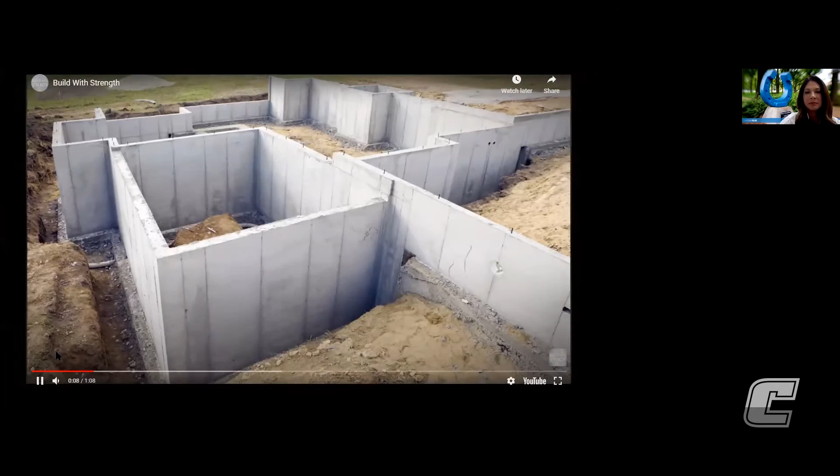Dr. Brown, is there supposed to be sound associated with this video? There is, you're not hearing it? No, you need to share your sound system with us. Sorry about that.

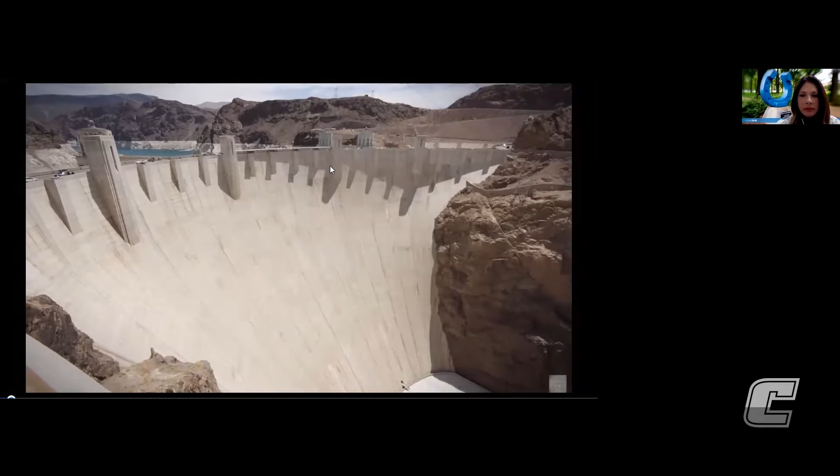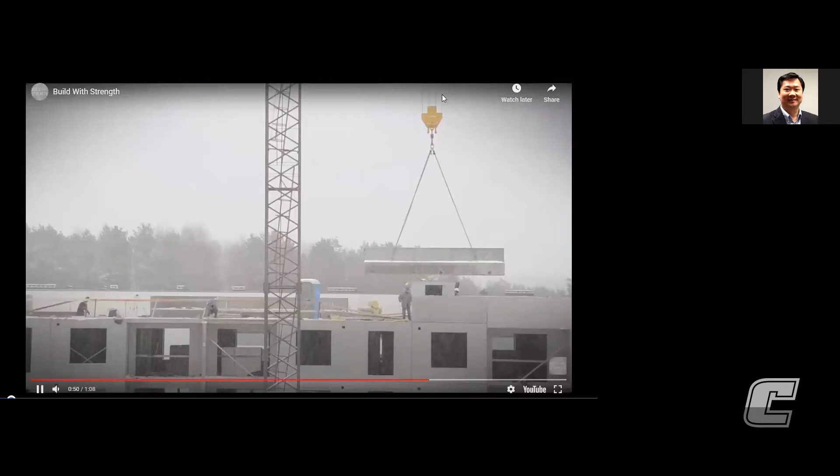If you look on the top menu where it says more and you click on that, it should be okay. Thank you. I've not had that problem before. Sorry about that.

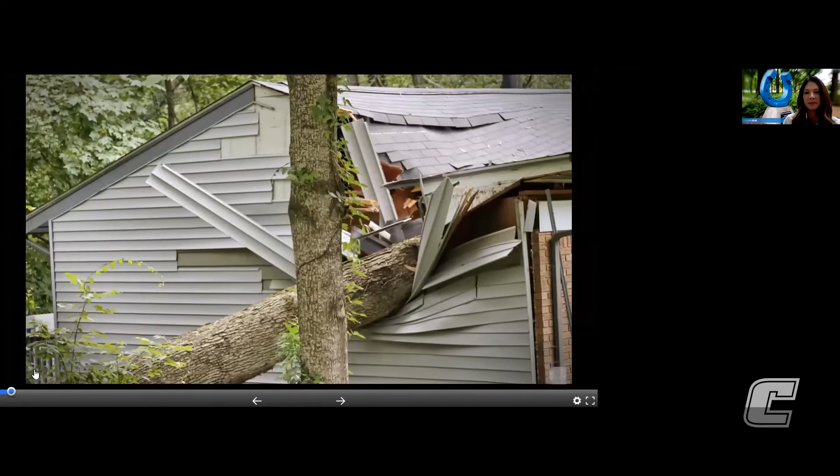Concrete gave America its spine. It allowed us to grow, prosper, and stand tall. That's because concrete lasts forever. Just ask the Romans. True strength doesn't burn, warp, deteriorate, rot, or yield. In fact, concrete gets stronger over time.

Imagine that. And for those who think concrete isn't flexible, it can be molded into any shape you can think of. Strength is innovative, beautiful, practical, smart, quiet. Strength doesn't bow to the elements. It thumbs its nose at Mother Nature when she's angry.

And that means it's perfect for low to mid-rise structures. So if you're an architect, engineer, investor, legislator, start from a position of strength. Build with concrete. There's no stronger investment.

So is everybody excited about concrete now? Really the video alludes to this—there is a history of concrete that's been around for a long time, and it gave credit to the Romans, which is really where we've adopted most of our recipe. But I can't go forward without giving proper notification to the Neolithic age, where the Egyptians built the pyramids. It's not the concrete recipe we're used to today—it was much different, but no doubt it still has the long-lasting durability we're so accustomed to with concrete.

Now, the real recipe that we've adapted over centuries is the Roman recipe. You can look at its basic components, and it's very similar to what we do today. When I'm talking with K through 12 children, I describe the recipe in terms of cooking, because I believe concrete is a version of cooking for our built environment. There are so many different recipes that perform so differently from application to application, so you can really take this recipe and make it your own every time. Every time you mix, you can adjust or tweak something and get a different performance value.

But basically, the Roman recipe involved similar ingredients: sand and water. Their version of cement, since cement hadn't been invented yet, was combining volcanic ash and lime. What I always like to mention too is modern day concrete is full of chemicals. When my students are taking classes, it's really important for them to have a great handle on chemistry. They don't always understand why, because chemistry doesn't seem like it goes with concrete on the surface, but actually chemistry is really how the entire cement hydration process occurs.

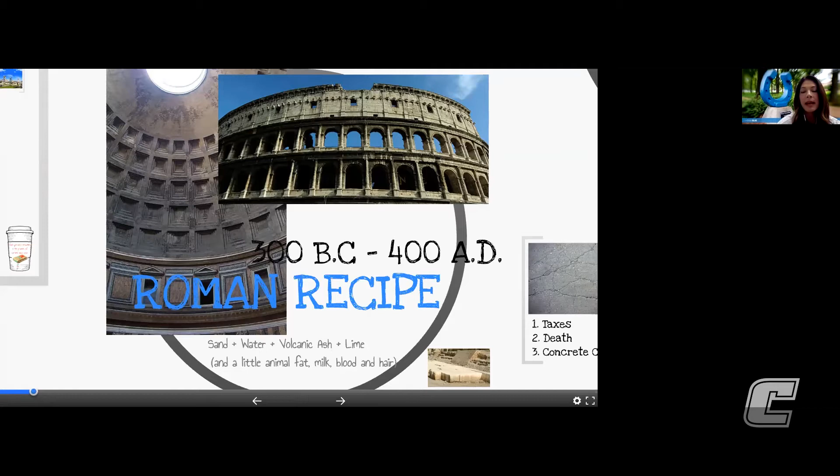The other part of chemistry with concrete is all the different admixtures we now enter into a truck of concrete. You're familiar with ready mix trucks driving down the road with the rotating drum—there is not a load of concrete that leaves a plant now without some amount of chemicals added to it. Back in the Roman days, those chemicals came in the form of animal fat, animal milk, blood, and hair, and we're using derivatives of those same things now. Fiber reinforced concrete is essentially an advanced version of goat hair concrete, but it's working, and the testimony really dates back to the Roman recipe.

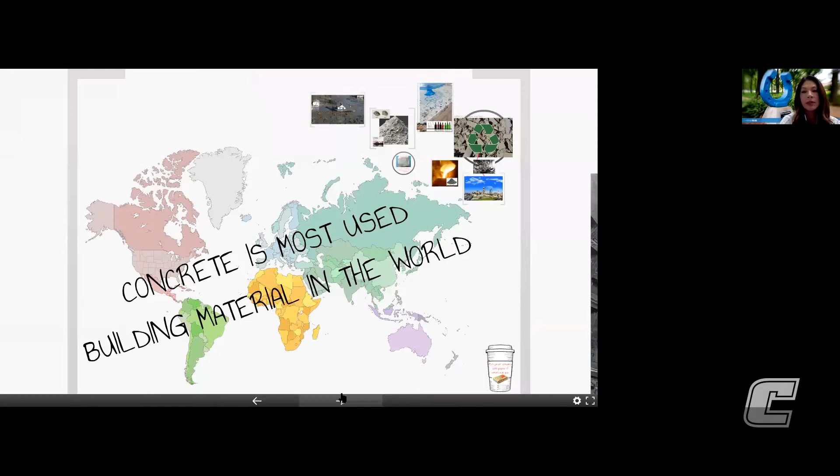Another adage I like to point out is that concrete is the most used building material in the world—it's the second most used material after water. A lot of people don't realize they're consumers of concrete. I compare it to drinking a Starbucks—you don't necessarily think about consuming concrete like you do your daily Starbucks. You don't brush your teeth with it, you don't dress in it.

You don't shower in it. So you're not consuming it like water or other important ingredients, but you are consumers of concrete just by living and breathing in our built environment—going to school every day, working, driving, going back home. There's a concrete element or component everywhere in your life. Even people in engineering and in the science field don't realize how much they're surrounded by concrete.

So I looked up the 2020 statistic, because it changes every year. In 2020, you're consuming about a half a ton, a little over half a ton, of cement just by being part of the per capita average. That's a lot of cement—if you think about it in bags of cement, each bag weighs about 100 pounds. So you'd have to go to Lowe's and buy yourself about 12 bags of these 90 pound or 94 pound bags of cement, and that's what you're consuming.

And that can be new construction, that can be repair and rehabilitation, but essentially this is being utilized and sold and manufactured in the world. And this statistic actually accounts for the US population.

But unfortunately, cement gets a really bad rap for its environmental impact. So I spend a lot of my energy now trying to help the industry find ways to be more environmentally friendly. I'm on a lot of different committees that really focus on that footprint, the carbon footprint of creating concrete. Cement is really the nemesis of the recipe. It's the most important ingredient that we can put in concrete, but it also is the one that's causing so much heartache in the carbon footprint discussion.

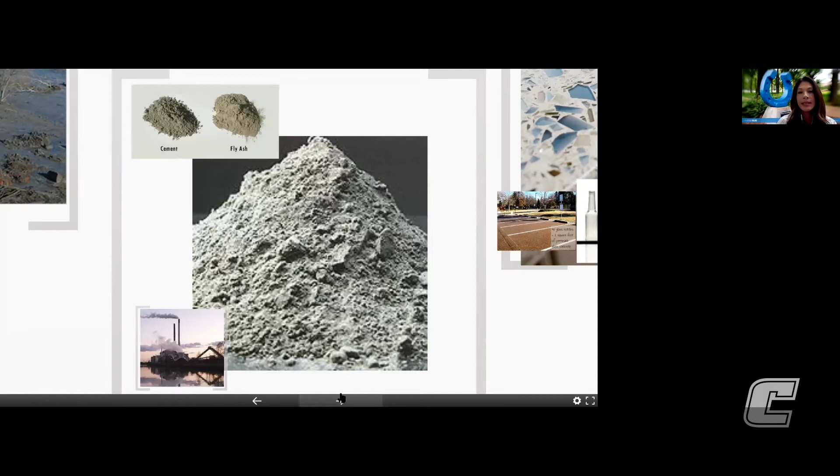So I don't think we're done talking about fly ash. Right now, a concrete producer probably puts on average about 20% fly ash into a mix to replace cement. So every time we can replace a portion of the cement, we're cutting down on our carbon footprint. And fly ash, because it's a byproduct, is not increasing the carbon footprint of the concrete ultimately.

So as you can see, pretty similar material. Fly ash is known to be a pozzolanic material, which means it does not react with just water. If I added water to cement, an immediate chemical reaction would occur called hydration. Several chemical compounds would form. That does not happen with fly ash.

So I cannot make a 100% fly ash mix without doing some other chemical composition changes. I have to substitute this for some portion of the cement. Fortunately, there's a lot of engineers that have figured out how to supplement even up to 75% of the cement with fly ash. So there's big benefits in trying to keep fly ash a readily available byproduct.

And we're not the only state suffering from this. North Carolina, South Carolina, there's other large energy, coal-producing states that are dealing with the fly ash issue. The good news is there's a technology out there that will reburn waste sludge ash that has been deposited into ponds. There is some energy involved in getting that product to be better, but it's minimal energy to be able to turn waste ash back into good fly ash. And that's the hope, that both government and private industry will work together to bring this product back to its heyday.

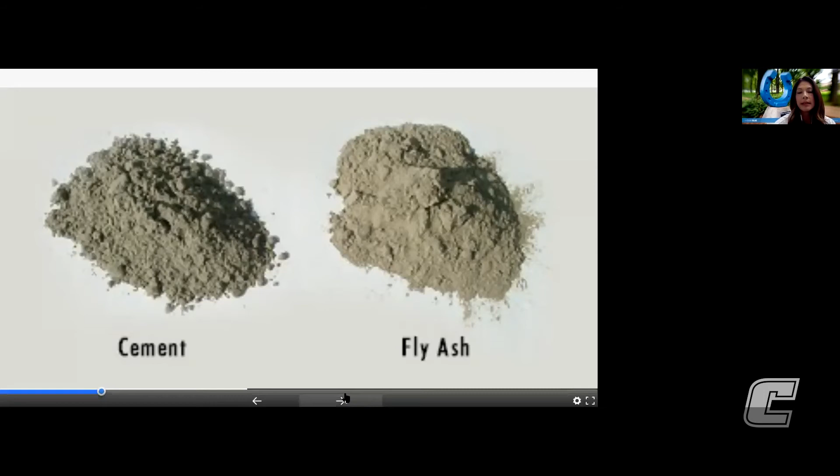So the other product that's actually gaining a lot of traction right now is slag. Because there is such a fly ash shortage, we're having to rely on other products and other powders, if you will, from other industries. One that has been around now for about 20 years is commonly known as slag. It's got a long proper name, ground granulated blast furnace slag, but everybody in the industry just calls it slag. It's a white powder that comes off of the smelting process.

So anything that has to do with manufacturing metal, the automotive industry for example, there's going to be some smelting involved with some of the different materials. As they're going through the smelting process, this fine particulate comes off and is a waste product to the industry. So we're able to collect it and grind it down a little bit finer, more similar to cement, and sell it. It's cheaper still, just like fly ash, it's cheaper than cement, and it cuts down on our carbon emissions as well. So it really is a great product.

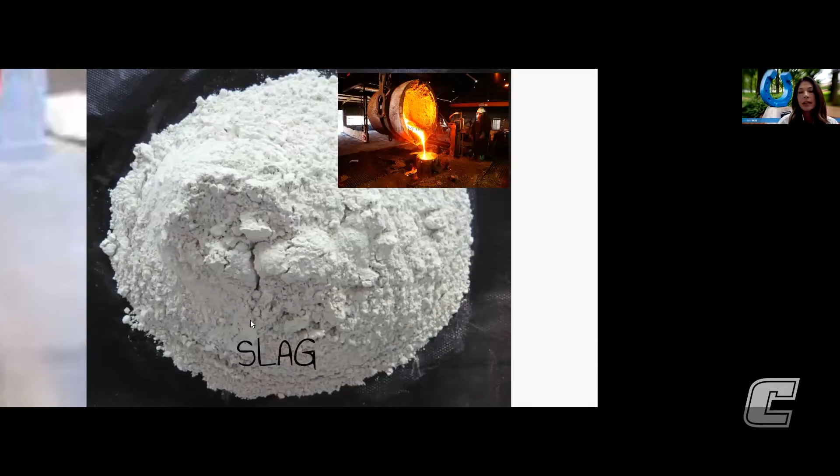It has a higher reactivity than fly ash, so I actually get more strength out of a slag-amended concrete. A lot of producers really like getting slag because they're able to sell it for both residential concrete and then high-rise commercial concrete because of the strength characteristics.

So the third powder that I'll mention is one that is really pretty special. Unfortunately, it's actually a little bit more expensive than cement, but it still is a byproduct, so it's still cutting down on our carbon footprint and greenhouse gas emissions. We're thankful for that part of it. But the industry this sources from is silicon dioxide manufacturing, which is really kind of a precious metal or precious compound.

So this precious compound is used in the list that you see here. We use silicon dioxide in our solar panels, in adhesives, lubricants—you can see the list. It's a very critical list to the function of society. Because of that, it's an expensive process. And naturally, even the byproduct they've figured out is special to concrete people, so they charge a little bit more for it. This dust comes out kind of a bluish gray, and it's used in high strength concrete. For example, in downtown urban markets, you're going to see a lot of silica fume concrete.

It's always a little bit darker too. If you ever happen to notice a really dark gray concrete as you walk, maybe in a parking garage, that's probably because it's silica fume concrete. It dries darker gray, and it has kind of a bluish tint to it as well.

What's unique about silica fume is it's ground 100 times finer than cement. So from a mechanical perspective, you're now filling voids that cement particles couldn't have reached before, so the density of the concrete is so much higher. That's really what's giving it so much of the strength. It's not that there's a chemical reaction occurring as much as there is a mechanical reaction.

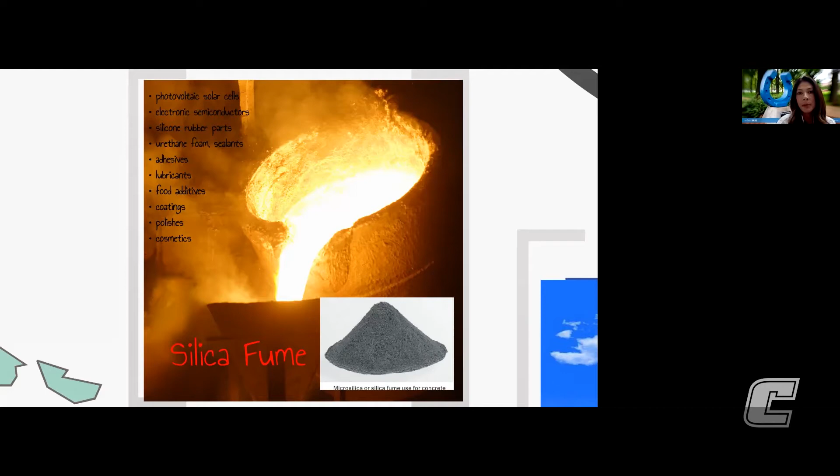The last kind of recycled product I'll talk about, and then I'll move to some other topics, is recycled glass. I wanted to bring this up because we're actually not doing recycled glass justice right now. This is an industry that is just on the verge of being such an important product to concrete, but we cannot get enough manufacturing facilities to take their recycled glass, their leftover glass, and do something with it. They're not sending it to the right facilities to be processed. And us as recyclers, when we throw our bottles into the recyclers, those bottles aren't even making it to the proper place as a waste stream for our industry. So we're probably a decade away from truly being able to utilize recycled glass to its fullest extent.

But there are people that are trying. In the state of Tennessee, we finally have one company, in Jackson, Tennessee, that is processing glass for concrete. And it's doing it for a lot of industries, not just this one. There's a process of taking this glass and chemically cleaning it so that all the residue from the actual glass product—whatever it was, if it was spaghetti sauce or a jar of olives—that residue on the glass gets removed. This company takes it to the next step by chemically cleaning the glass and then processing it down to the size that we need.

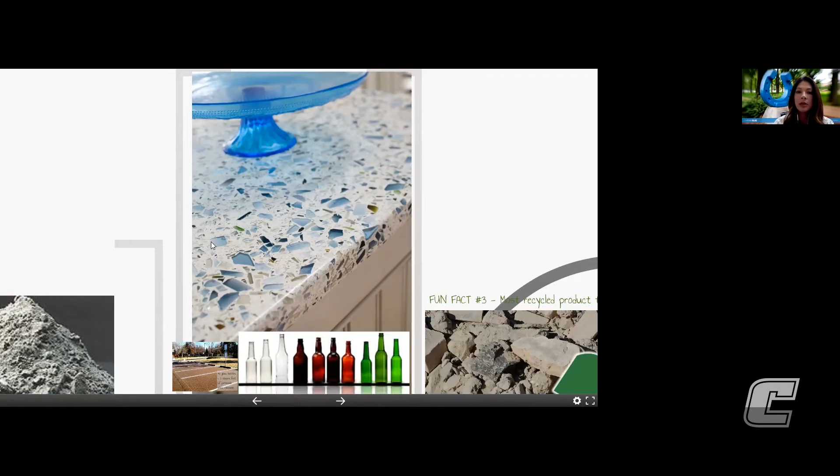You can really process it down to any size. This would be a replacement for aggregate, so instead of using natural aggregate, you would use a recycled glass aggregate. This creates a very architecturally pleasing concrete. It's very popular in the decorative industry, countertops and floors. We're really seeing this take hold because owners want this—it's a look and a feel of concrete that is really pleasing.

But if you get down to a smaller size, there aren't as many applications being used yet. One that I've been a part of here at MTSU is recycled glass pavement. The big advantage of this is not only is it using recycled glass, but this is actually permeable pavement, for very unique applications. You're probably familiar with permeable pavements already—there's pervious concrete, actual permeable pavers, porous asphalt. That's been on the market for a while. But this is recycled glass permeable pavement.

We placed about 8 parking spots here in Murfreesboro to do a research study. It's very interesting because it shows up in a very different trucking mechanism—you don't actually mix it at a concrete plant and truck it to the job site. You actually mix it in a mobile mixer.

So the glass is in the truck, and at the last minute, the glass is coming down the chute. It intercedes with an epoxy material. This epoxy material coats it just enough that the glass sticks together, but leaves several voids so that it's still permeable. So this does not have cement in it at all. It is literally just glass and epoxy.

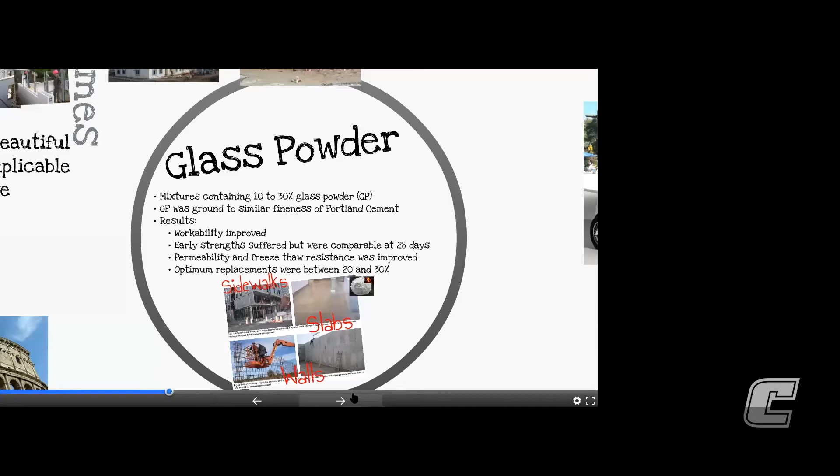All right, so I would like to talk a little bit about some applications. One of the things, I'll skip over and come back to homes. One of the things that I'm really excited about as we look at how to cut down on our environmental footprint is a very brand new process called CarbonCure.

So we're taking the emission waste from other industries, injecting it into new concrete. And the beauty of all of this is it's mineralizing into the fresh concrete and creating strength within the concrete without having to add extra cement. So a concrete producer can actually cut down on their cement content around 5 to 8%. It's not a huge number, but it's something.

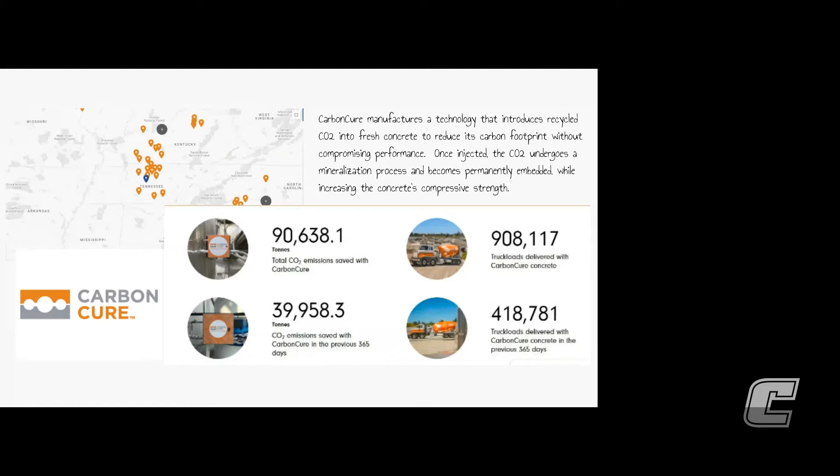So they can cut down on their cement content and then in turn be environmentally friendly by helping other industries get rid of their waste carbon dioxide. Already we're seeing Middle Tennessee take advantage of this. You can see by the map, there are some in North Georgia and North Carolina. So it is spreading.

There are some statistics here talking about how many carbon dioxide emissions have been saved so far. So 90,000 tons of CO2 emissions by this process alone. And this technology has only been around now for a little less than 2 years. So they're making a huge impact on trying to figure out ways to cut down on cement content, but also help other manufacturing industries.

I will give you a quick chemistry note on this because it'll come up later in the presentation. When CO2 is injected in concrete, you might wonder, how am I getting actual strength? What is happening is it's combining with calcium hydroxide, which is naturally emitted out of the hydration process. And when those two things meet, you get what's formed as calcium carbonate, which is essentially a form of limestone.

So that's where the mineralization process occurs. And that's where CO2 is coming in handy to be able to cut down on the cement content. So I can get strength out of this process without having to add the extra pounds of cement to get me to my target PSI that the engineers have.

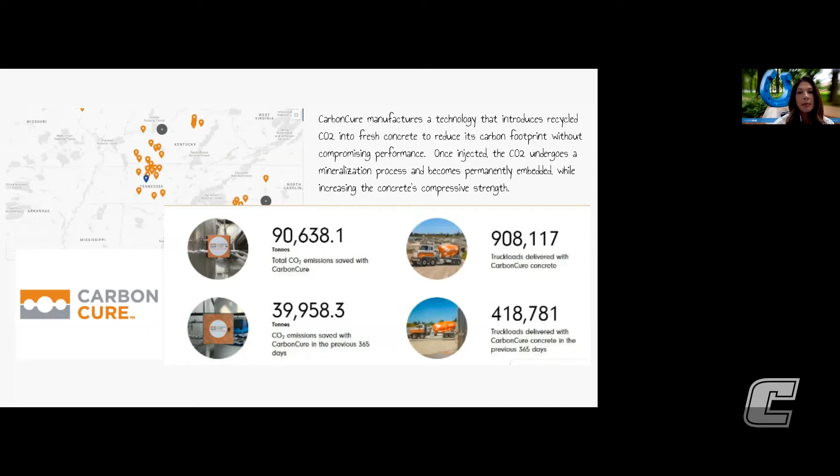So just a close-up view of where we're seeing plants. Here's Greater Nashville, and you can see all of the plants now that I can order Carbon Cure concrete from. We're actually going to be doing some Carbon Cure placement here on campus very soon, so we can demonstrate it. The concrete doesn't look any different, so nobody would really know there's Carbon Cure in it, but the idea that you're creating a greener concrete is really great news.

So on that same note, I mentioned that calcium carbonate is a weakened form of limestone that is formed inside concrete. There's another group that has come up with what's called self-healing concrete, and we've worked with it here in the lab as well. It was a group out of Italy that came up with this concept, and they've come up with quite a few creative and ingenious concepts with concrete.

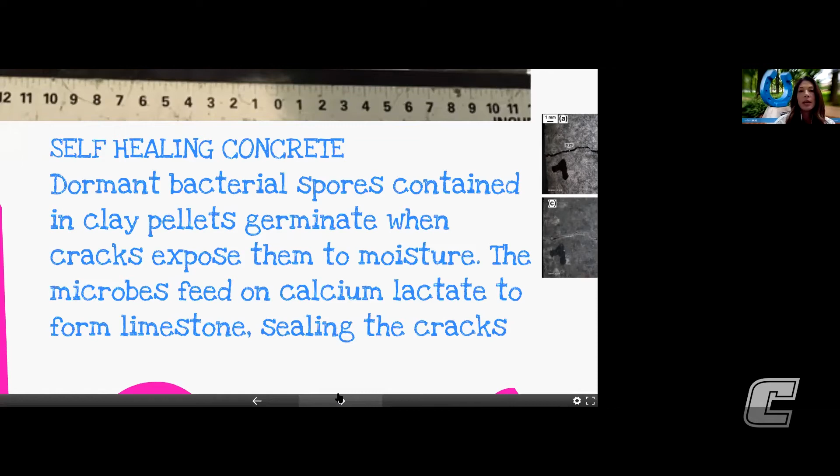The concept of being able to heal your own cracks was the goal in mind. What they're essentially doing is injecting the concrete with a bacteria that will then create that calcium carbonate, so the concrete crack seals itself with its own mineralization. Here's a before and after picture of this process.

The latest on this is now they're injecting it into fresh loads of concrete, so you do not have to wait for the concrete to crack for this to work. This experiment shows a before and after picture on the left and a before and after picture on the right. A crack formed and they injected that crack with bacteria containing the right microbes to create that calcium carbonate. When oxygen and water hit it, it started creating that limestone and filling in the crack.

This is only after 100 days. So after 100 days, this bacteria took hold of the concrete and basically self-healed itself. This is just another example here on the right. What was early learned was that you could do this after the concrete cracked.

What we've learned since then is you can actually inject this bacteria into the concrete in production, deliver it to the job site, and then at any point in the life of the concrete, after it cracks, it will self-heal itself as long as it has moisture present. So it does need water - it's almost like watering a plant. You have to have some amount of moisture available and oxygen. So for certain environments it wouldn't work, but for certain climates and conditions, exterior concrete would absolutely heal itself.

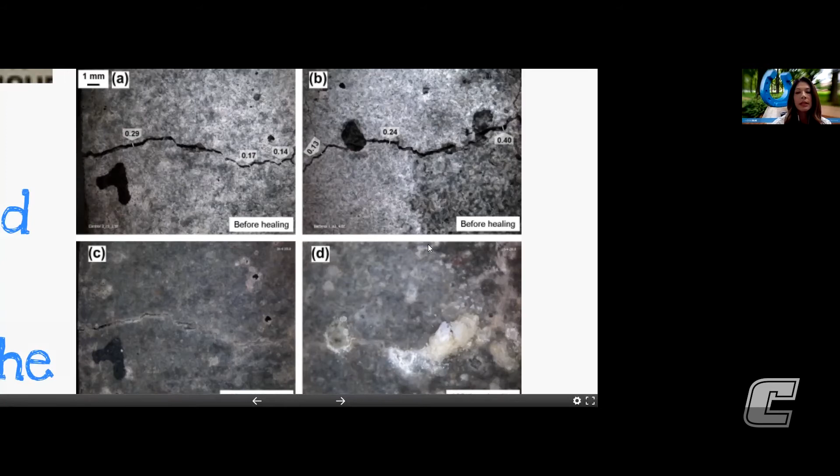So on the same note, you have self-healing concrete, and you also have smog-eating concrete. I personally haven't been on a large project on this - I've been on a research project and seen the application, but they are already building roads in St. Louis, Detroit, and Chicago. Some of the Midwestern states have taken hold of this. There's a lot more concrete paving in the Midwest than there is here in the Southeast.

We are typically an asphalt state, so smog-eating concrete hasn't really taken hold in Tennessee, but in the Midwestern states where they have a lot of concrete paving, we've seen this quite a bit. I'm eager to get to a project where I can actually see it in person, but the concept is really quite wonderful. The group that came up with it originally did so because it was about self-cleaning.

The product that they're using is titanium dioxide. If any of you have that white plastic fencing at home that you get from Lowe's or Home Depot, the kind you're used to seeing around suburbias, there's actually a titanium dioxide paint used on that white fencing in hopes of keeping it cleaner. I'm sure you've still pressure washed your fence a couple times since you've had it because it doesn't keep it perfectly clean, but the idea is this titanium dioxide paint helps keep that white as bright as possible. That concept then translated over to the concrete industry, and they started putting it in their concrete, hoping to keep concrete whiter and brighter.

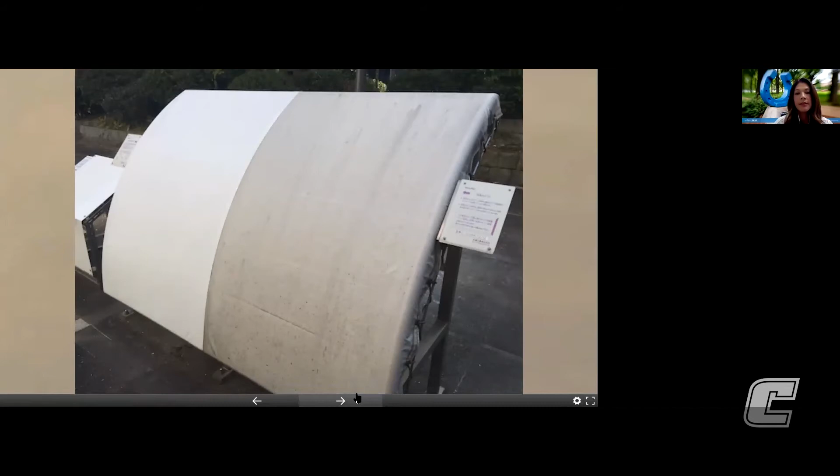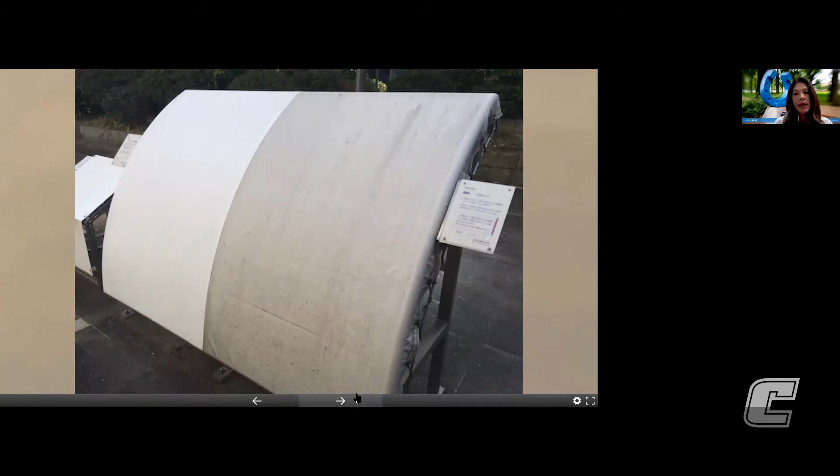And the great benefit is you actually get cleaner concrete. So the concrete on the left has been treated with that titanium dioxide, and the concrete on the right has not. They ran trucks past this — it was like a closed circuit where they ran trucks right by this research site to prove that smog coming out of large trucks colors concrete, turns it an even uglier color than the gray it already is. The titanium dioxide concrete not only turns that smog into nitrate, but it keeps the concrete a whiter, brighter color.

I think you're going to see more of this. Here's the bad news: titanium dioxide concrete is about 7 times the cost. So our DOT is not running out and buying titanium dioxide smog-eating concrete because it is more expensive. All the placements I mentioned were really research-based placements — the Detroit, Chicago, and St. Louis placements — funded by research dollars to see if this really will make a difference and make those cities cleaner.

If the data starts working in our favor, I think we will see it in our area. I think it's going to be a big benefit. This smog-eating concrete will work up to 8 feet in the air. So any concrete surface, whether horizontal or vertical, up to 8 feet will clean the smog coming out of the back of vehicles. It really could be a game changer.

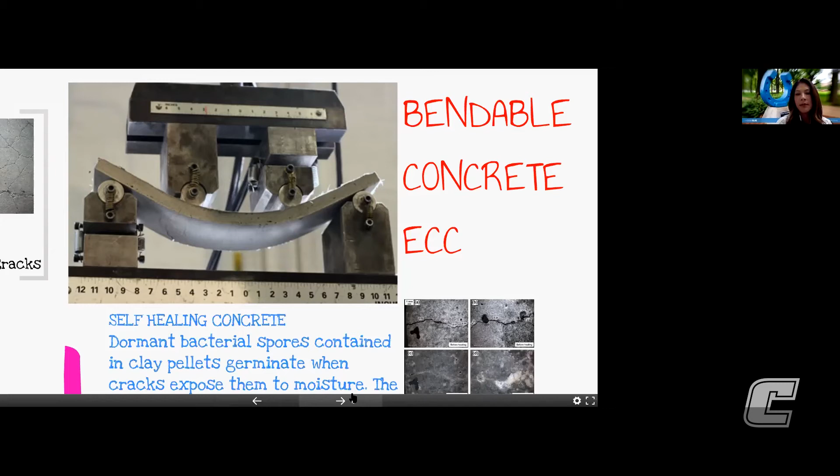Just like smog-eating concrete, though, it is higher priced. They've gotten this down to 4 times the price of normal concrete, but that's still 4 times the price of normal concrete. So no doubt this is not something a DOT or FHWA is running out and buying off the street. This technology is still outside the purse strings of the government, but in private industry we're definitely seeing some placements going down. So that's good.

And just some fun concrete. There's concrete now that you can see through. It's called translucent concrete - you see shadows essentially. They're using this in office buildings in Europe to try to improve worker morale. Lots of people don't have windows in their office, so the thought is, okay, you don't have a window, but now you have this shadow effect of cars or people passing by. They've done a few studies and it actually is improving worker morale and attitude.

So we're not seeing it in a big way over here yet. There is a company, BASF, a Chemical Admixture Company, that has purchased the rights to the material used to create translucent concrete. So it is in America now, and they are selling it to certain projects. I think this is also going to be a product we might see more of as they look at the benefits of it. Right now, I think the understood benefits are a little slim.

Worker morale is important, but are there other things you can do with translucent concrete that will make a difference? A gentleman I actually know personally invented this glow-in-the-dark concrete about a decade ago - he's out of Southern California and was into decorative concrete. Then there's fiber optic - anybody can do this. You can buy on Amazon right now for $20 a full strand of fiber optic that could light an entire kitchen. The idea is you could come into your kitchen at night to get your nightly snack, and when you turn your light on, it would turn your countertops on too.

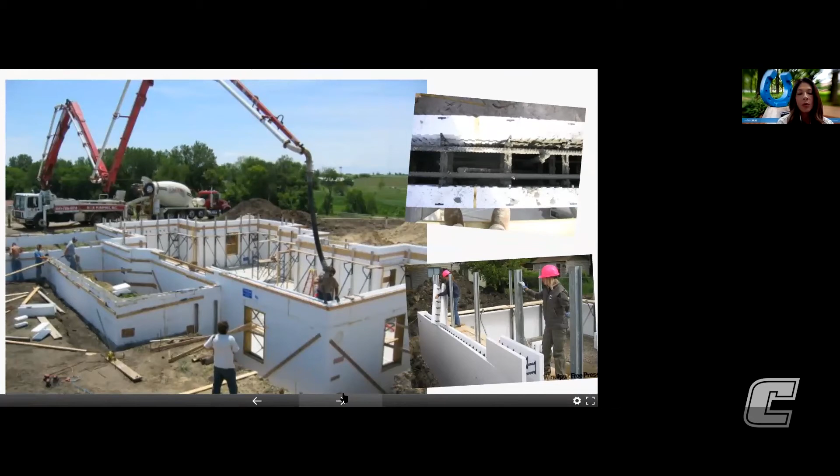But really what I'm talking about is insulated concrete, and we're seeing a lot more of this in our market. It's really surprising that we're seeing it, because normally you see ICFs in a market where there's a lot more hills. So I definitely feel like you've got opportunities in your market - you've got a little more landscape and hills in your area to see more ICFs.

So insulated concrete forms are really like Legos to me - I look at them as like styrofoam Legos. They come on the job in long segments, you can pick one up with your pinky. They're very lightweight, very user-friendly. Workers love them. The concept really is pretty simple: you stack them and then you fill the core with concrete.

So the concrete's not the outside skin anymore, which is why this concrete house ends up being so beautiful - because you can put any veneer on this building that you want. You can still drywall on the inside, and you can still put brick and siding and all the things you love about your normal house on the outside. And it's heavily reinforced - that's one of the big benefits, it's rated up to 200 mile an hour winds. So you're basically building your own tornado shelter within this home as well. I've been on a couple of projects - we have a couple of good contractors now that know how to build with this.

I think that's probably the biggest thing that's holding us back, is having enough contractors that understand ICF construction and how they can save money. I built my house about 15 to 18 years ago and priced this product hoping I could build an ICF house, but I could not find a contractor in 100 miles that knew how to build with ICFs. There was a lot of uncertainty about what this product could do. But now it's much easier to find a contractor, and the price is really only about 2 or 3% higher than stick frame. I'd guarantee you right now, if you compared the price of ICF with stick frame, ICF would be cheaper because lumber costs have gone so high during this pandemic.

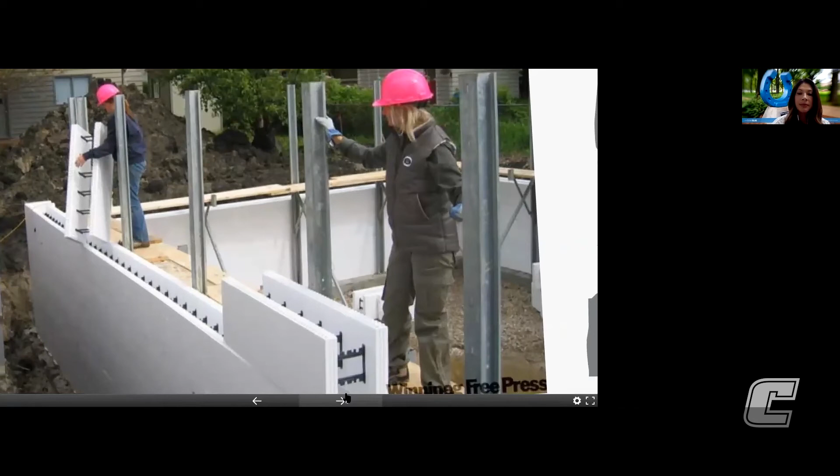So I show a couple of females here building an ICF house, but these are super lightweight. The workers who are used to picking up big heavy blocks or forming with big heavy materials have been much happier on these job sites. And then a pump truck comes in and creates the magic.

And then even more recently, the Bahamas last year was hit by Hurricane Dorian, and there were several concrete houses on that island that survived, though they experienced a lot of loss of infrastructure and life there too. So really trying to look at what this means for us to move in this direction. I think it's life and loss of buildings, and we just have to reconsider what we think of when we start building homes.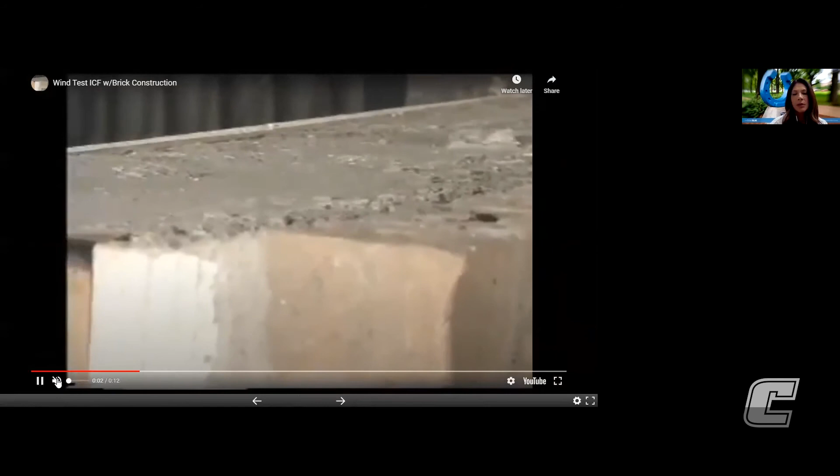So this would be a brick veneer on an ICF wall. And you can see that that same 2x4 is barely going to break the brick. It doesn't even go through the wall at all because the ICF wall is solid concrete. So I think the difference there is pretty dramatic.

I'm sure a lot of you have heard about the movement that stemmed out of China with 3D printed houses. China really has taken this and run with the technology. We're seeing it here in the US with 3D printed houses. There's 1,000 square foot houses going up in a day. I think this is probably yet to be understood about how we're going to truly benefit from this, whether it's emergency shelter that we build, or real homes that people live in, day out, being built in America this way.

But I think the technology is here to stay. I think young people are excited about 3D printed houses. I think the material composition is exciting because you're working with different powders and different chemicals to really make that perfect mix. And then you're working with different configurations.

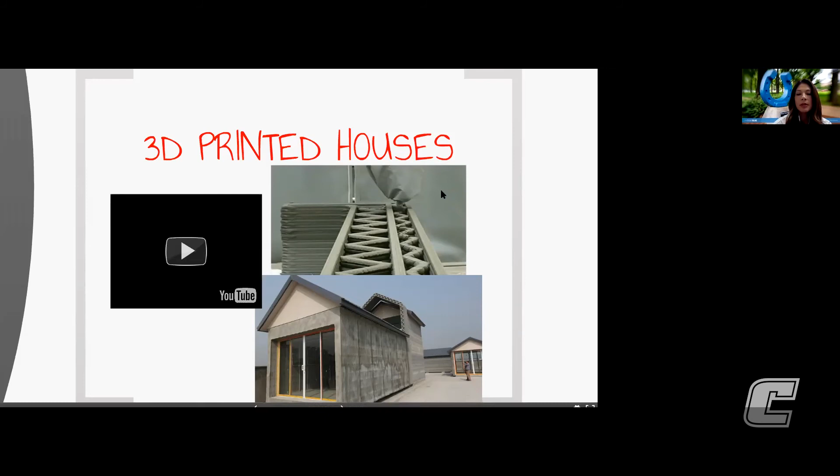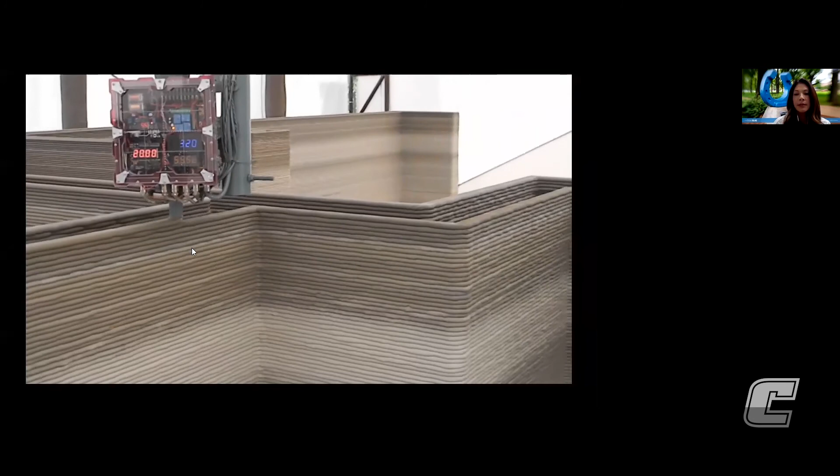What really is going to work with a 3D printed house is going to be a lot about the engineering, determining different flexural and tensile and shear resistance as you start looking at orientations of how this 3D printer truly works. Right now, the R&D, if you talk to somebody that's really researching 3D printing concrete,

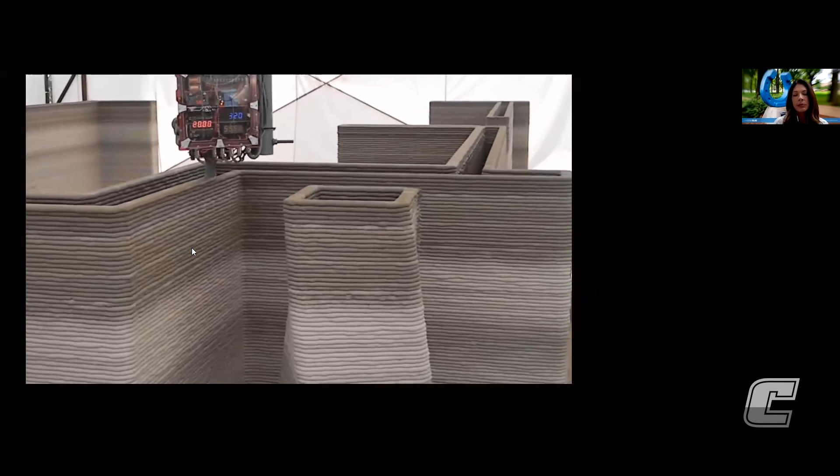is really about the slumpability and the workability of this material and how it really has to stand up on its own. As you can see, that bead has to be high slump enough, high workable enough to come out smoothly and consistently, but it also has to hold itself up. It has to have some amount of rigidity. And there's a science there. It's not an easy concept. There's really a lot of trial and error that has to go on with the mix design to make that happen.

I mentioned fly ash earlier. I bring this up because this is a way that we can use fly ash in a way that's not being used currently. There's a lot of waste ash that is high carbon, and we cannot put high carbon ash in concrete. That is one thing that we know is not allowed. And the reason is high carbon ash creates a lot of problems with the chemical matrix of concrete. So high carbon ash is really a waste product that just gets sent straight to the landfill.

But MIT is working on a concept where they would power their city cars. The city car initiative came out of MIT, where you have self-driving vehicles that tourists can come and rent for the day and see the sights of, let's say, New York City, in a car that's readily available to them, much like the bike system you see in major urban areas.

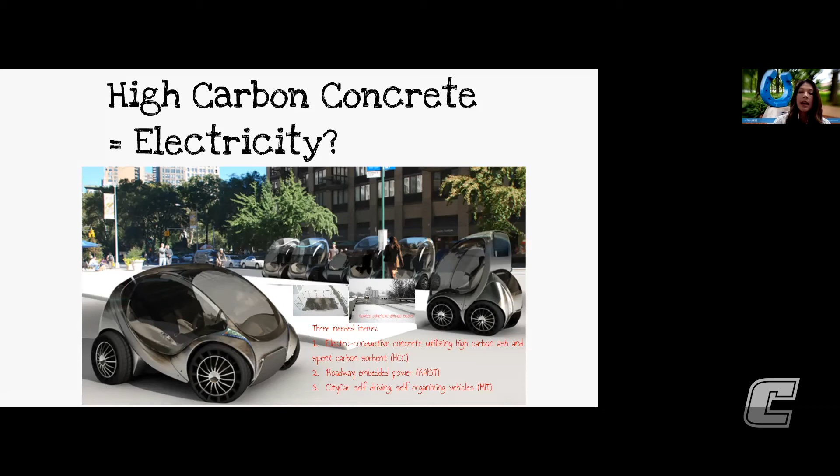But the idea is that the road would actually help power the vehicle. So this is still a work in progress. The city cars are actually manufactured now and available, but how they power them is still being determined city by city. Right now you'd have to have an above grade or above street level powering system to make sure they stayed on the route you wanted that car to stay on, because you don't want the driver to have to worry with it. But I think the high carbon concrete is a great concept that we hope turns into something.

All right, last two projects, and I'm really proud of these because I was part of some of the research on these as well. One of the things concrete has been known to do is turn into not only a cast-in-place material, but also a material you can make off-site, precast, and then deliver to speed up your schedule.

Nashville undertook an initiative to repair 8 bridge decks in greater Nashville, and they wanted to do that in 8 weekends. This was very aggressive because bridge decks don't normally get repaired in a weekend, they get repaired over several months. The concept of fast-fixing a bridge deck was really new. Only one other state in the country was doing it: Connecticut was the first state to start doing these fast fix bridges. So accelerated bridge construction is essentially the concept.

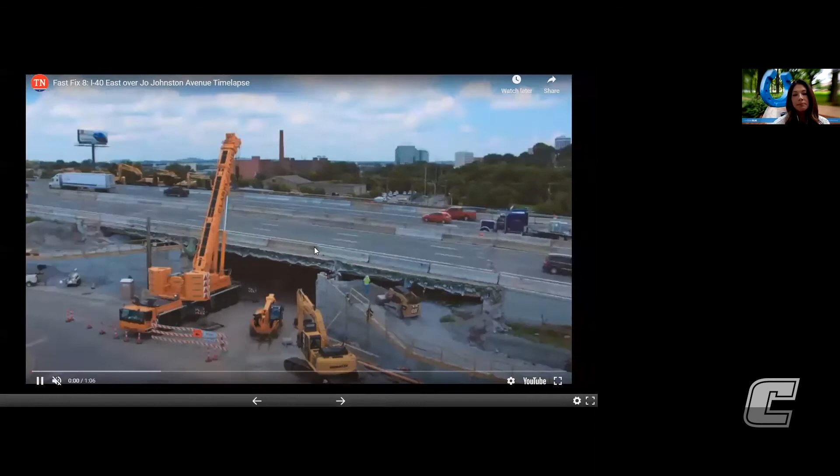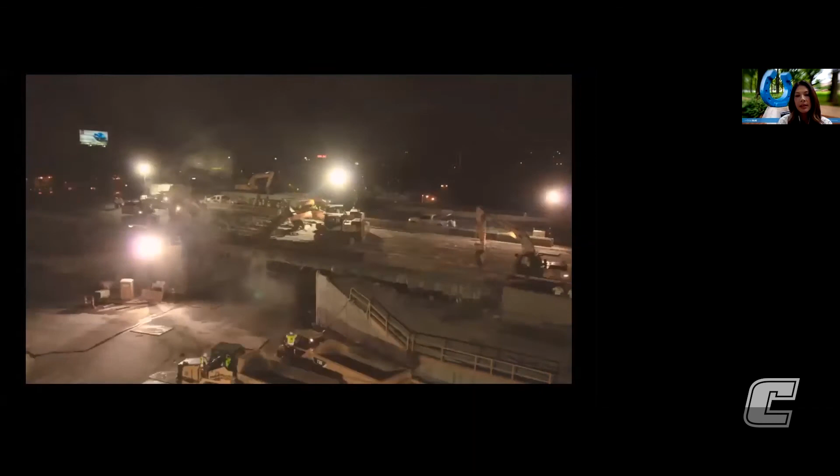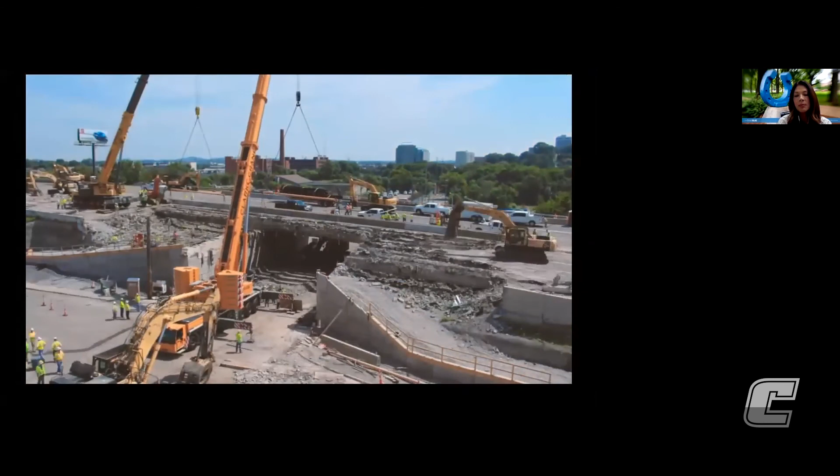How we got involved is we were the testing lab that invented the grout mixture that sealed the bridge deck together at the end. What you're seeing here is hydro demolition, taking off the old bridge deck, then literally plucking out the old girders to make way for the brand new precast girders. The precast girders were made off-site, placed in a laydown yard, and delivered to be cast in one weekend, all happening from Friday night to Monday morning.

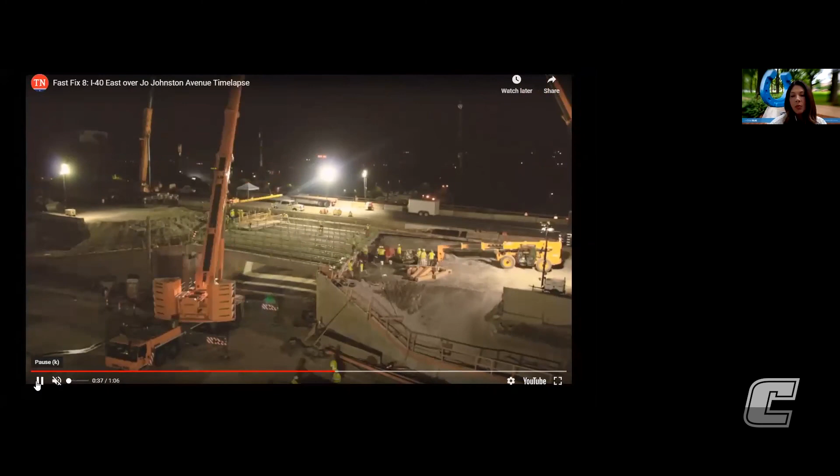I'll pause here, but what you see now is them putting down the precast panels. These panels were also made off-site, and as you notice, they have seams in them. So the one product that had to be made on site in a ready mix truck was the material that would seam all of these panels together.

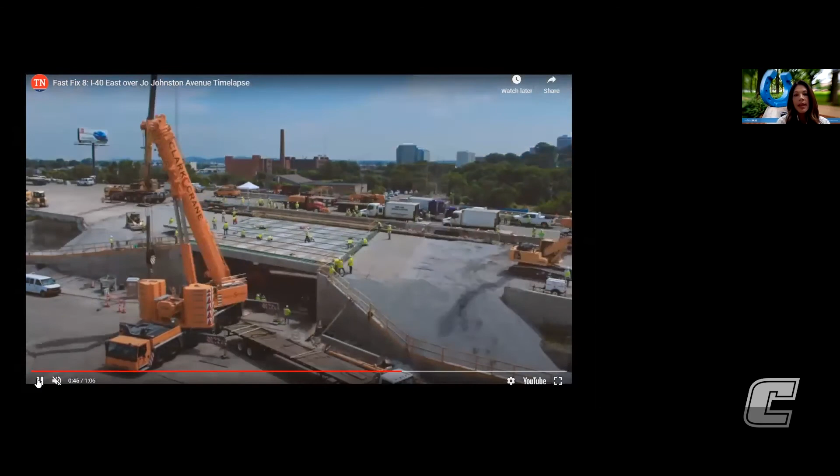They wanted to put traffic on this by Monday morning, so from Friday night to Monday morning was the construction cycle. MTSU's lab was brought in to invent the grout mixture that would seam all of this together, and it had to reach 4,000 PSI in 3 hours. Ultimately we were able to do the job, and they repaired 8 bridge decks in greater Nashville with this material and process.

When the red ready mix trucks show up, that's the grout mixture you see going in and sealing up these panels. Ultimately they were able to pave it and open it up for traffic the next morning. It really is a beautiful project, and they did this 8 times over in one summer. Memphis has done this as well, and I've heard Knoxville is next on the list to start doing fast fix bridges. It's really exciting to have a concept like that work in Tennessee, fixing a bridge in 52 hours is amazing.

This project is near and dear too, and just right up the road. If you come to Nashville often, you've probably traveled on 440, and the 440 loop around Nashville is very congested. It was built long ago with 2 lanes, a nice grass median in between, and then another 2 lanes. They call that a parkway instead of an interstate, but 440 has long been an interstate, not a parkway. So they decided to take up all of the grassy median and turn it into more drive lanes, much like Atlanta has done.

What I love about this project is, and I'll tell it to anybody that asks, this is a huge environmental effort. They basically rubbleized all the old concrete pavement into large boulders, into 57 stones and 67 stones. This is the grassy median where they tore up all the old concrete pavement, put it there, and ground and crushed all of the old pavement into new recycled aggregate to put under the new asphalt road.

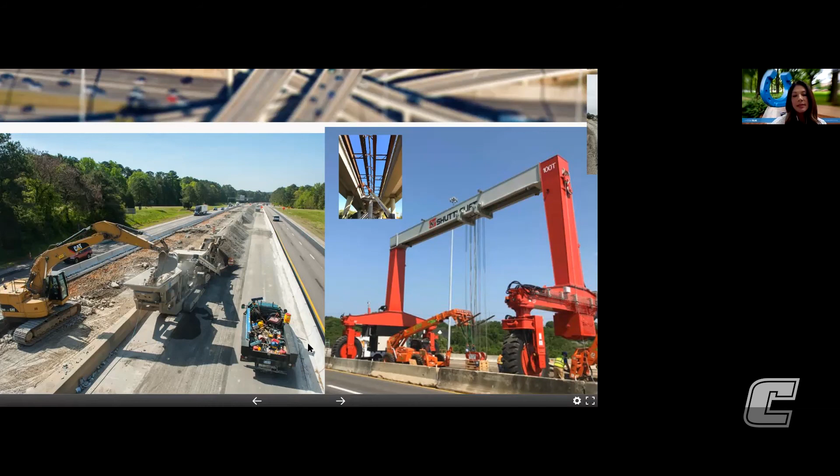So the bridge itself had a gap in between, and they came in and inset new bridge panels to have 2 more lanes of traffic on a bridge that was already built. So pretty neat that they were able to basically build a bridge in the sky in between 2 existing bridges. That was also a very unique concept, where they didn't take anything down, they just added to it.

So pretty neat. So I mentioned cement stabilization. My nod to professors there at UTC is I'm working with UTC in the civil engineering department on continuing this thought of stabilizing roadways. We have a research contract right now with TDOT. UTC is the lead PI, and I'm a subcontractor on the contract, where we're working with them to figure out more roads that we can stabilize around the state of Tennessee to allow our asphalt roads to last longer.

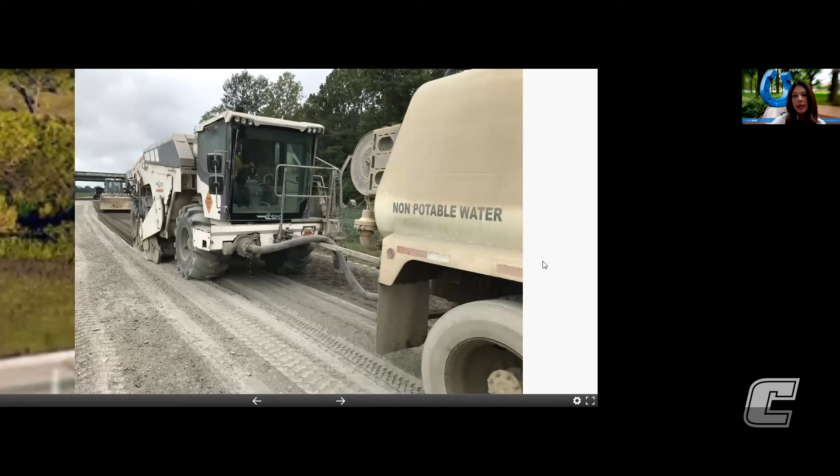So far we've investigated 2 different roads around the state, but essentially this is where the magic happens right here. This is a reclaimer, and it's basically grinding this road into subbase and subgrade material, so that you're not having to truck off any material or bring any new material on. So the concept really is about grinding the road in place and then sprinkling cement on the road, watering it. So you got your water truck there, and then coming back over it with your final paving surface.

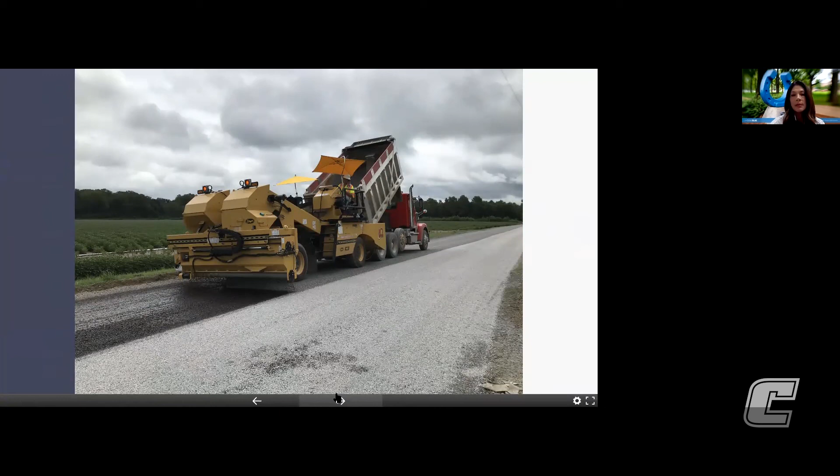What we're seeing already is really good rideability numbers, really great deflection numbers. And we really feel like for low traffic areas, this is going to be a great technology. So I'm happy to work with UTC on this.

And I just want to remind everybody that, as you get into your career, it's always good to get outside of this country to see how construction is used in other places. It's really amazing how many countries are doing things even better than the US. You go to Europe and you see how their homes and apartments are built. In some cases, they're light years ahead of what we do here. So I try to get out and travel other countries and just see their construction processes.

And I've been really proud of a project that we've done in the Dominican Republic, where we've helped restore their reef with artificial concrete reef. That's been a project that I feel like is really helping the environment in a different way. They've been also hit by several hurricanes, and their beaches are eroding away. So we've been down there about 5 summers trying to make sure that we're helping save their beaches essentially. Otherwise, they will not have a tourist industry and not have a way of life, because they're primarily tourism.

So that's a long and winded conversation about some of the work I do here. I've really enjoyed being able to share it with you. I hope I've sparked some interesting ideas, and I would love to hear from you. I'm easy to find, heather.brown@mtsu.edu. If you have any great ideas or just want to chat, I'd love to hear from any of you. So thank you.